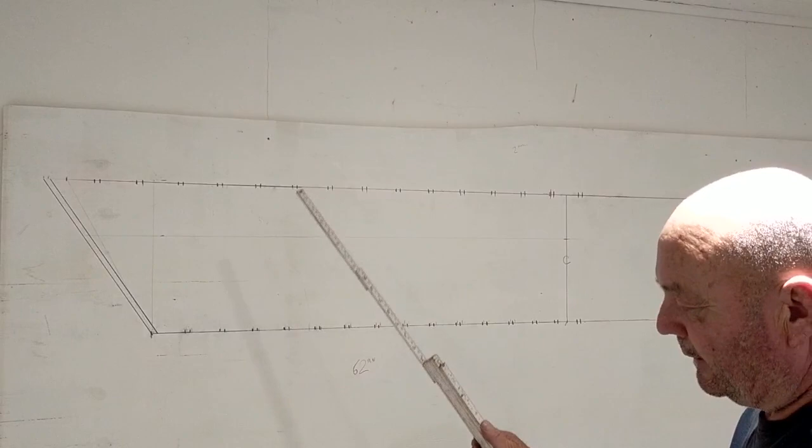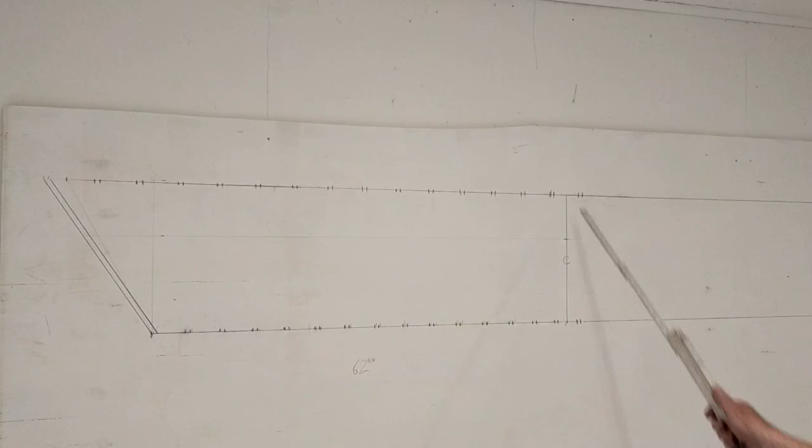Right, flat cambered arch. What I've done, I've set this one out as it would be on site, and it's 1810mm, that's 5mm either side, so you get your framing. Right, we're using standard bricks. So you start off with the springing point. Well, I wouldn't, I'll start off with the centre really. Mark your centre, and then we know we have a key brick in the middle. We must have an odd number of bricks in the arch. Key brick, and then if it's bonded, it's got to be even courses either side. I'm only going to set half this out to show you. So, centre line, mark your key brick in the middle.

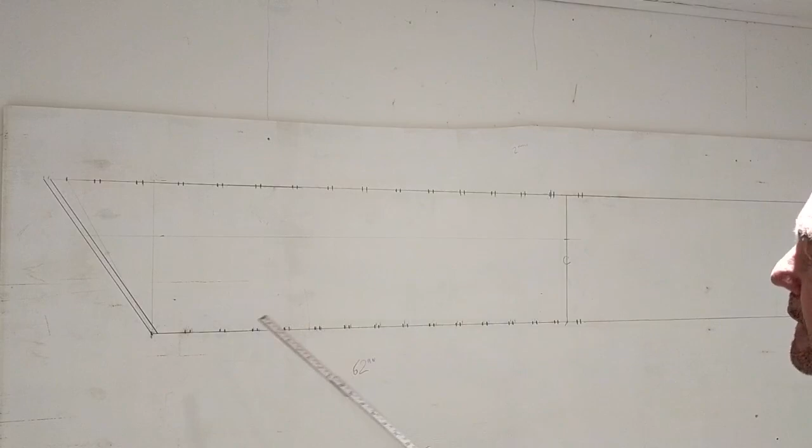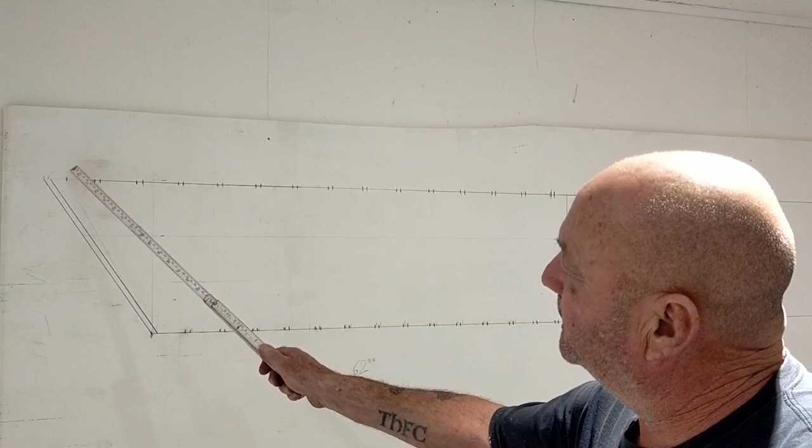The skew back, now there's rules for the skew back, and the rule is it lays back 1 inch for every foot span. So 1800 is 6 foot, so it's 6 inches. So I measured 6 inches from there to there, and then the other rule is that this should be 60 degrees. That's not really set, but I've done this at 6 inches, I've checked that, and it is 60 degrees. But if it was gauged brickwork and it was red rubbers or something, you'd work to that 6 inch mark, the 60 degrees mark, because your bricks are going to be cut to it. We're using just normal standard bricks.

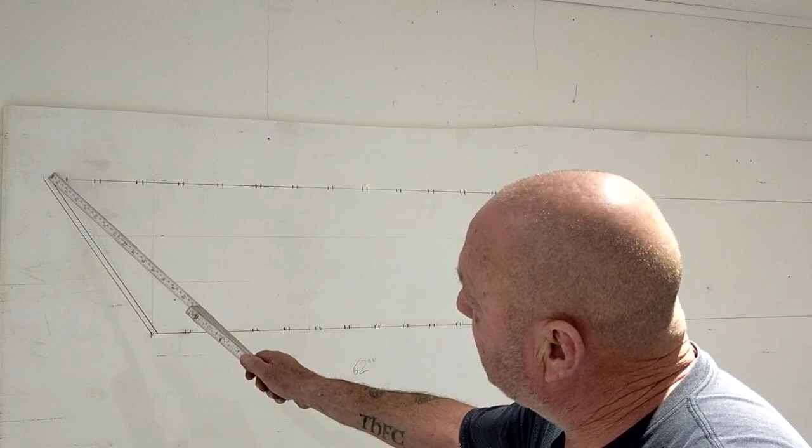So we've got the gauge from the centre brick to our mark there, 75mm of course. Now I've marked it, and it brings me to there, which is a little bit over 60 degrees. That's fine, it doesn't matter, it's not that set. You could knock 2mm off of course, which I may do if I was doing it on site, to bring it back, and you've got 8mm joints, which looks alright. So we've set that out, right? We know that works.

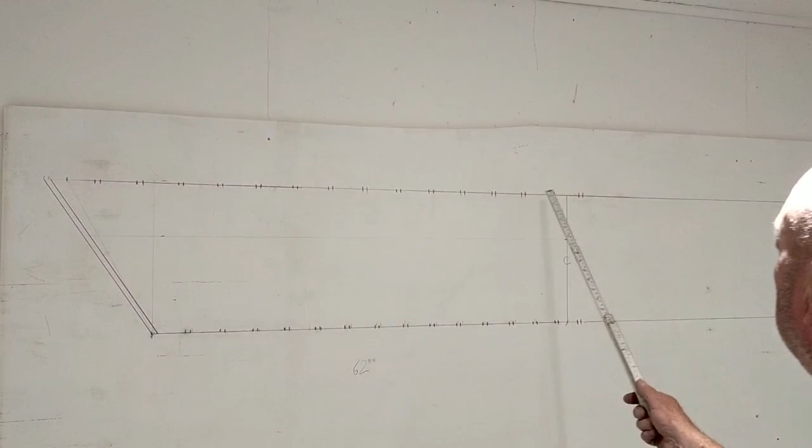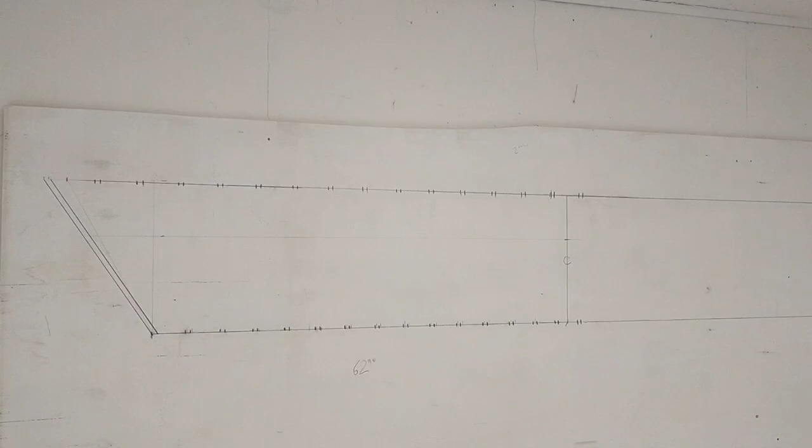Now, what they would tell you to do in college or any of the books is chase that line down right the way to the centre of the arch, which is down there on the floor somewhere. It's impractical, it really is. So what we know is we've got 14 bricks through there and the key brick. So if we measure from there to the end of the arch, which would be 1800 for courses, divide that by 29 courses, and that gives me 62mm a course. So now we know this gauge is 62mm.

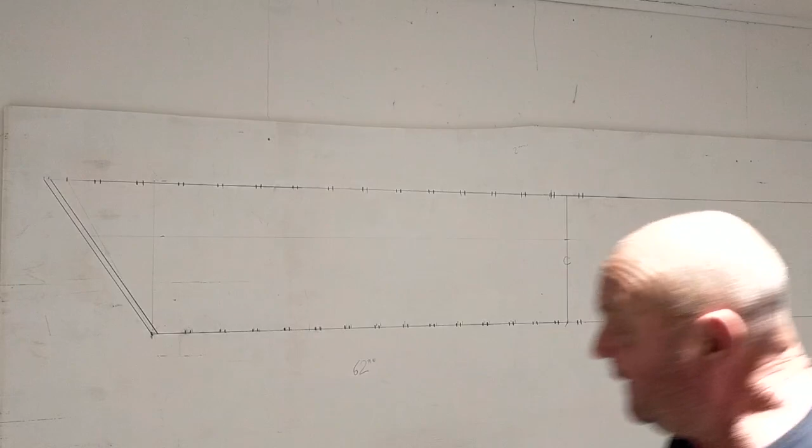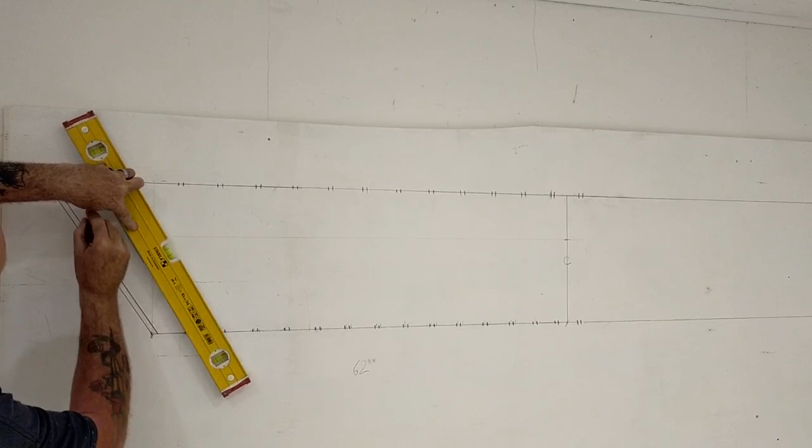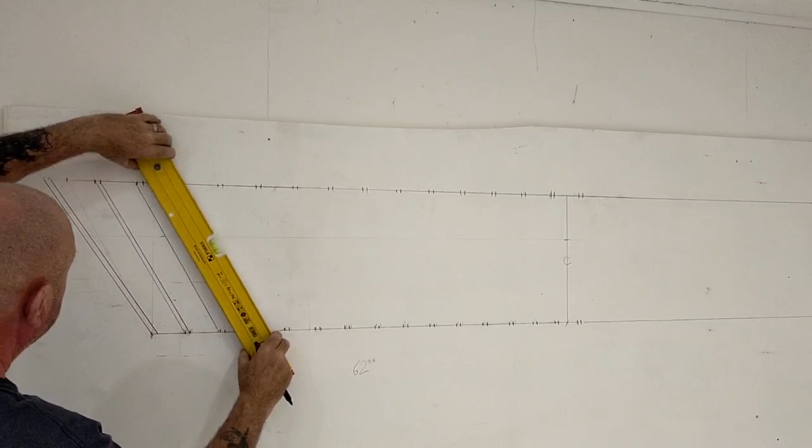So start with the key brick again, do your 62mm one there, then gauge it back to there. And there, now, without any geometry, you've now got... not too accurate here. Good enough for what we want. Just do one more.

Right, there you go. I'll put the joint in. Quickly do this. You get the general idea of it. There you go. That's how you set it out. Yeah, that's it. It's as simple as that.

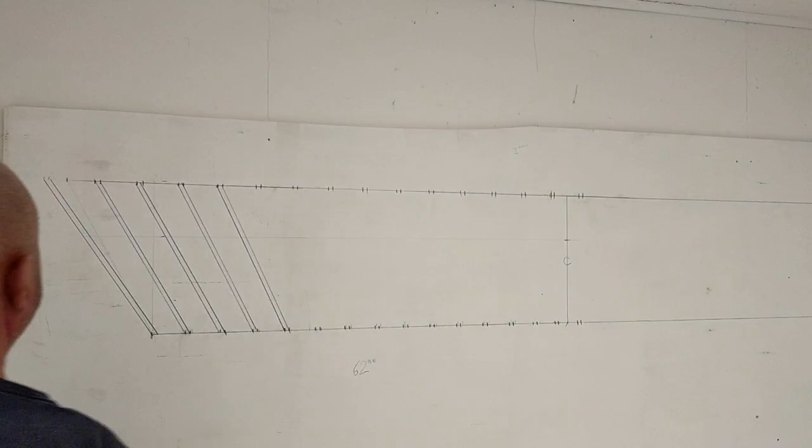And then it's going to be bonded. So, yeah, however way you want to start it, really. You can start it off like that. Sweet as, eh? Right, let's go on to the next bits.

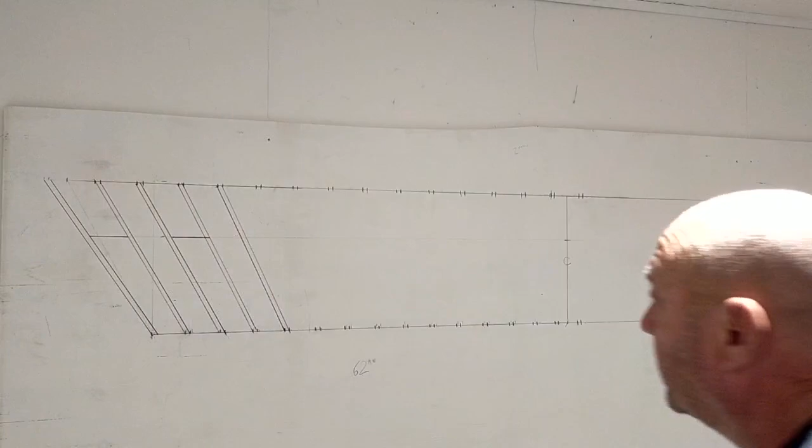Okay, next what you have to consider is the optical illusion with these flat arches. So if you're building one, you're going to replace one maybe on a sash window or something, so it's going to be a true arch, it won't be sitting on anything. These arches, you get an optical illusion where it looks like they sag. So what you do, you have to put a rise on them.

And the rule is, the old rule is, it's 1/8 of an inch per foot span. In this case we'll do it metric, it's 3 millimetres every 300. So that gives me from there to the rise 18 mil. Now I've always found it too much. I've always halved it and it's fine.

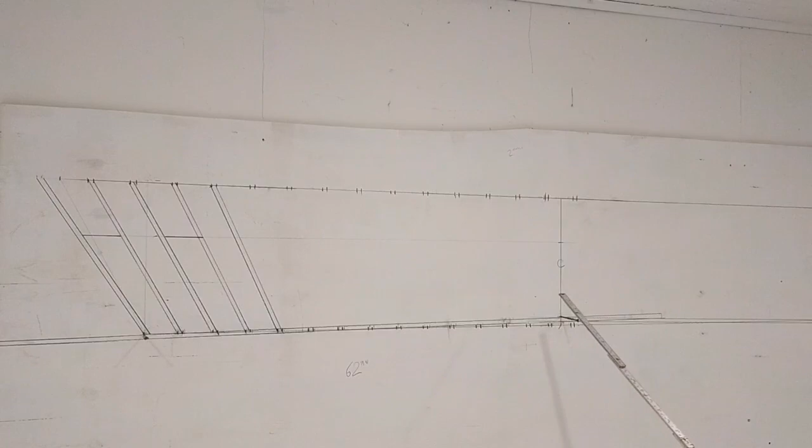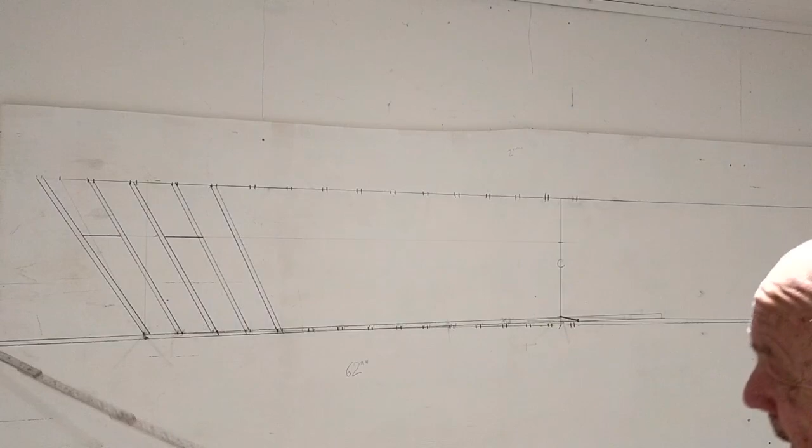So how you do this, you put a nail in there, and now we'll leave it at 18 mil higher there, and a nail there. Then you want a piece of batten, which will go right the way up to there somewhere. A piece of batten there, so that's touching that point, and that point. Then you have to just brace it with the batten across there. It's a two-man job, so I can't really show you.

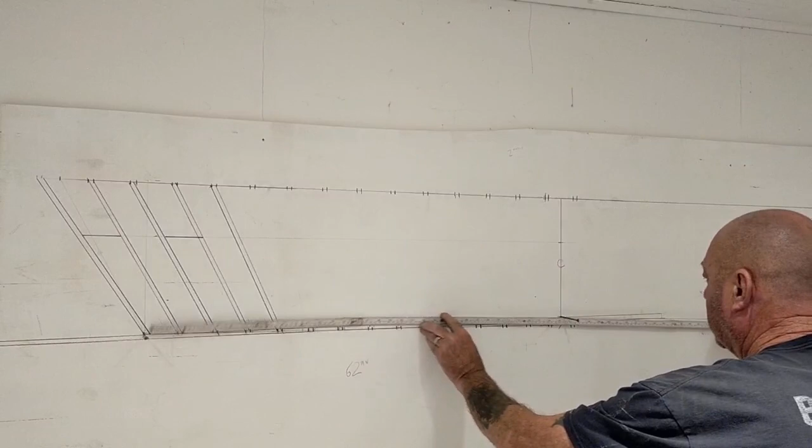So you've got this diagonal, this triangle there, and then you move it. I can sort of show you like this. You move it like that along with your pencil in that point there. So the pencil, as you move along, gives you that arch, that arc. You got it? The pencil will go there. You've got another bit there. And you just chase that through.

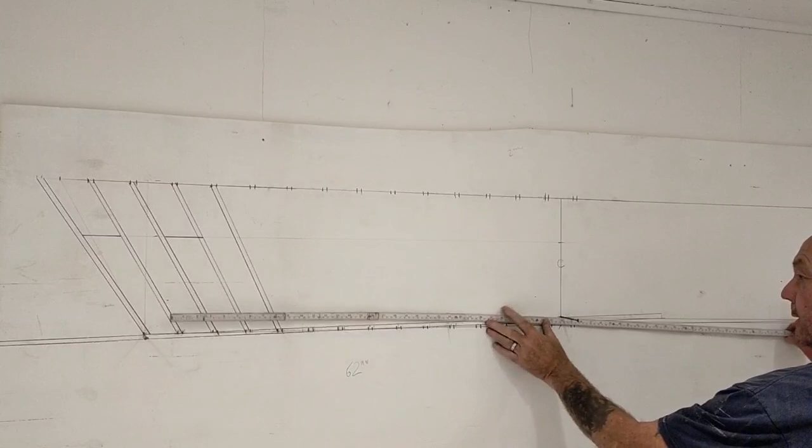Right. Normally, when you're doing these nowadays, it sits on a Catnic lintel. I think it's because the Catnic lintel's straight, it takes away that optical illusion. You don't need to do that. I've done them on garages, 3 metres long, and straight, not doing this arc bit in it at all, and it doesn't look like it sags. So I think it's the lintel that does it.

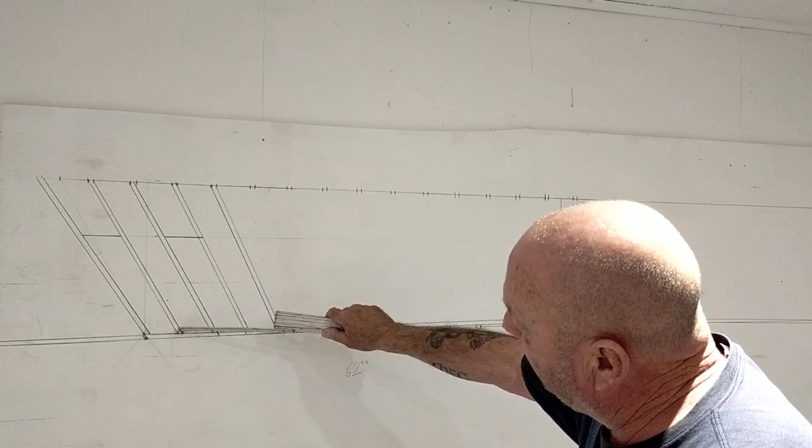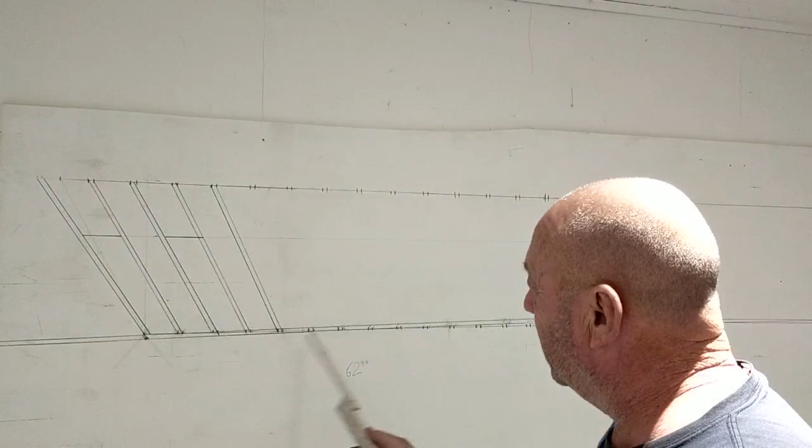Right, what was it now? Oh yeah. If they're sitting on the lintel, which they generally will be. Now this is 300. I find you have to take 5 mil off this bottom to make it 295, and that allows you for your lintel just sitting on there. 'Cause you don't bed them on the lintel, you just let them all sit on there dry, and that works out fine. Just to make them 295 from there down. So that bit goes with your brickwork, 295 down, and that allows for the bit of lintel on it.

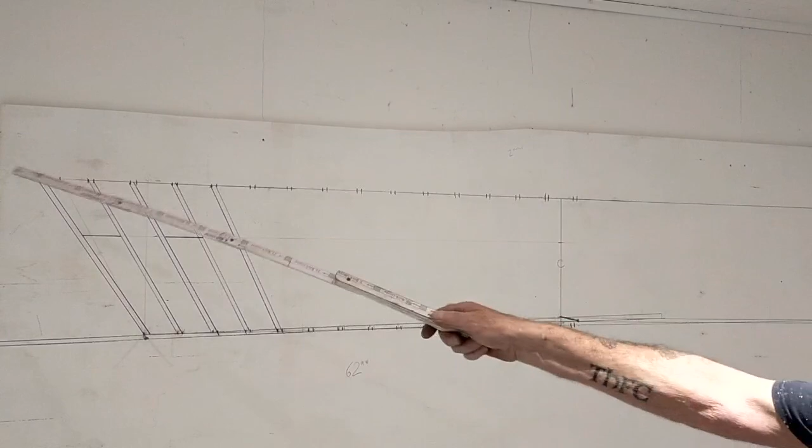And then when you lay them, I'll just make a gauge rod to that, and one on the bottom. You can lay that gauge rod on the top from there to there, and just lift it up as you put each brick in. So that's right, gauge rod on the bottom, and just range them in, each one. I think that's it really.

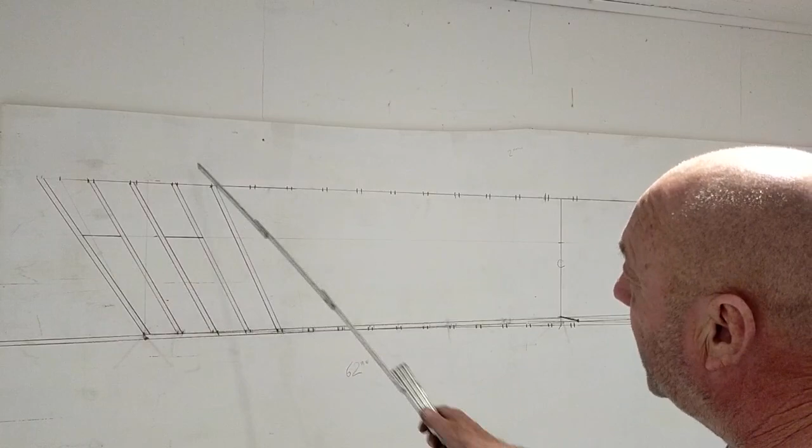When you're cutting them, you have to make a template for each one. You can make one template and mark each one off there. I find it's so minimal you can get a bit messed up on it, so I tend to take the time and cut a template for each one.

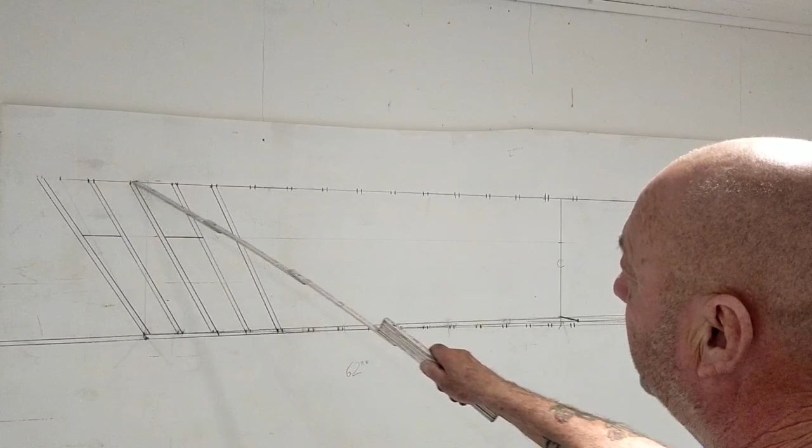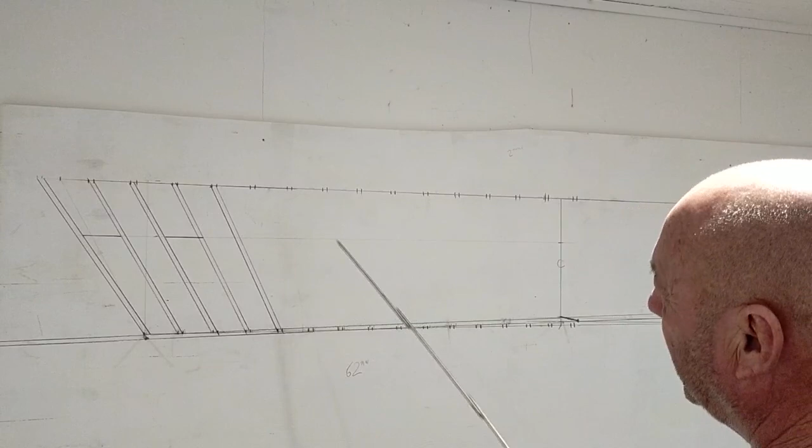When you cut this, I find it's more accurate if you leave these over the sides and cut them as you're laying it, because you can sort of bed them in. You'll have a string line across the top there, you can mark them and then just cut them there. Because with these normal standard bricks, when you're laying down, they wobble about a bit. Well, it's alright, I've done loads like it, but it seems more accurate if you do it as you go.

Yeah, flat camber arch, how to do it. I hope that's helpful. You never know, you might have to do one. Nothing to be scared of, same as everything, just got to work accurate.